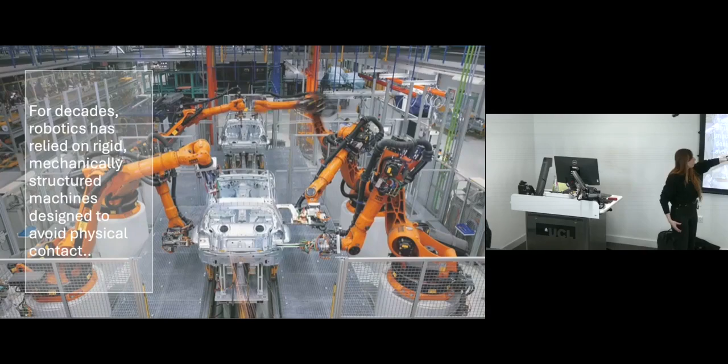So, you know that we started robotics with something like this, where robots were designed to avoid as much as possible physical contact, physical interaction with the environment. And mainly in this context, as you can see, there were no humans in the loop, sensors were mainly nonexistent, and the environment was really, really controlled. And robots were mainly programmed to do a single task.

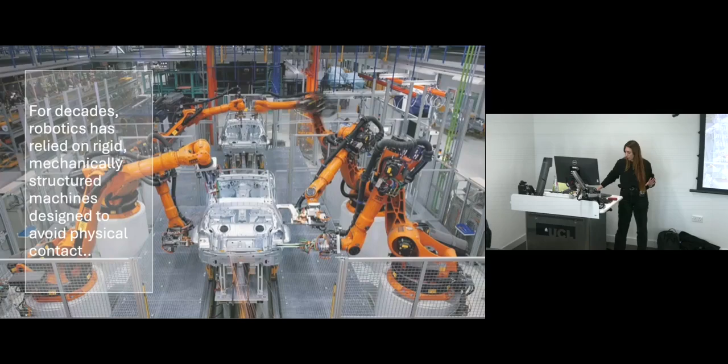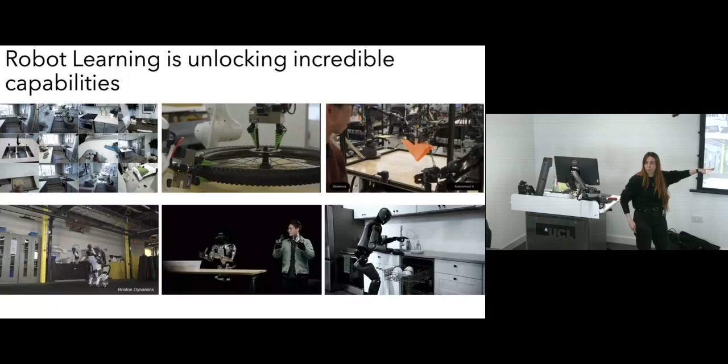But of course, we moved very far from this, and now we are seeing, and you are studying, that with robot learning we can achieve incredible capabilities that before for robots were simply a dream. And you can see this not just in manipulation, but in locomotion, and in general in dynamic behavior for control.

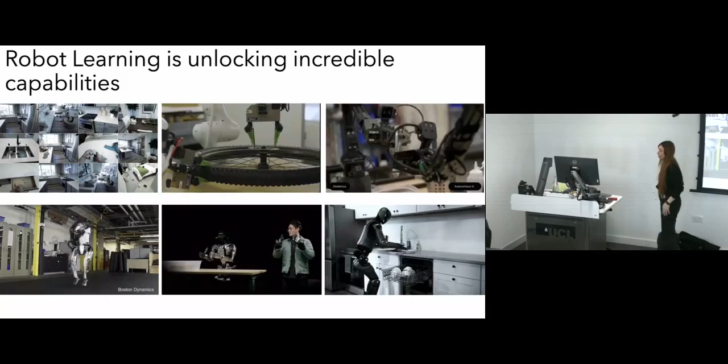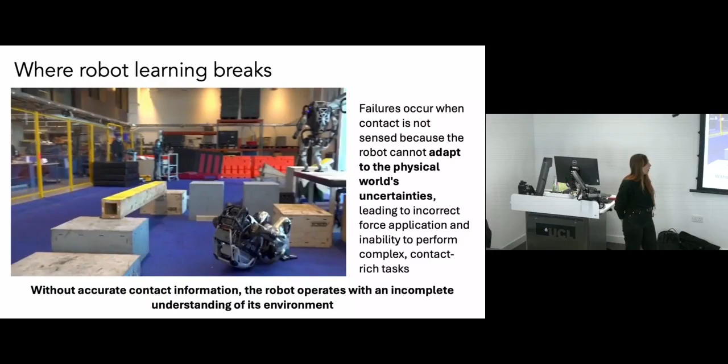However, today, what I want to draw your attention to is that, despite this, there are still situations in which robot learning still breaks. We can still see failure, especially when contact is not sensed, because the robot cannot adapt to the physical world. And so it is not able to deal with uncertainty, and this leads to incorrect force application, and maybe inability to perform certain tasks. So, without accurate contact information, the robot operates with an incomplete understanding of the world.

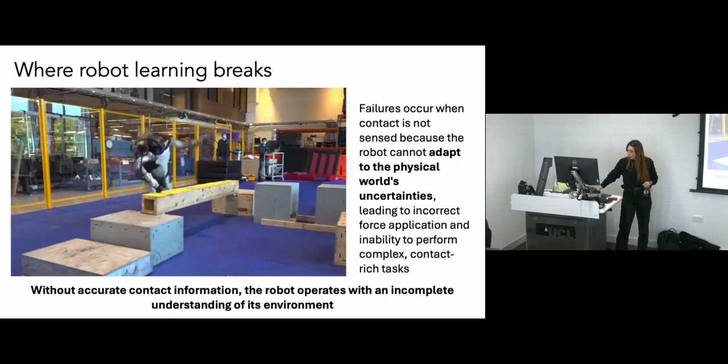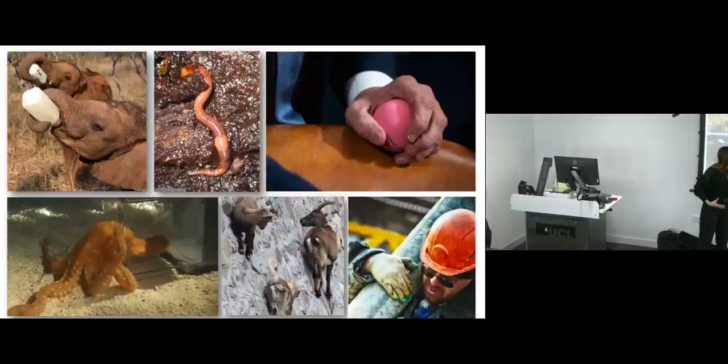And in the context of my research, to try to solve this problem, I've started to look at how biological organisms, humans, instead deal with this uncertainty. And if we look at this, what we can see is physical contact is definitely embraced. We have bodies that are not rigid, but soft. But also, we can really rely on our tactile perception, our sense of touch.

So what we will look at in this lecture is how I'm trying to take these hints and look at providing robots with the capabilities to safely interact with the environment, sense it, and enable this physical interaction. In this respect, my journey started with the design of artificial skin, in the past, when I was doing my PhD. And the idea was to provide the whole robot with the opportunity to measure interaction forces.

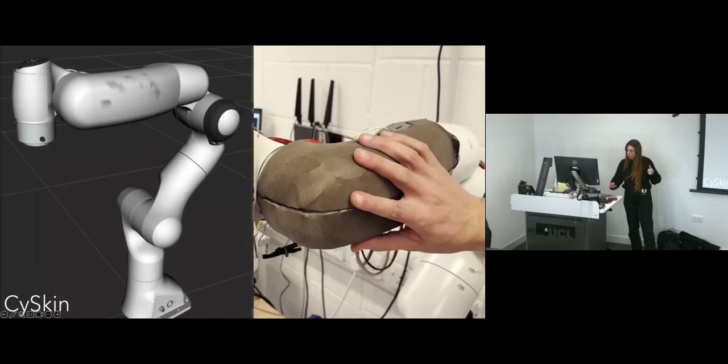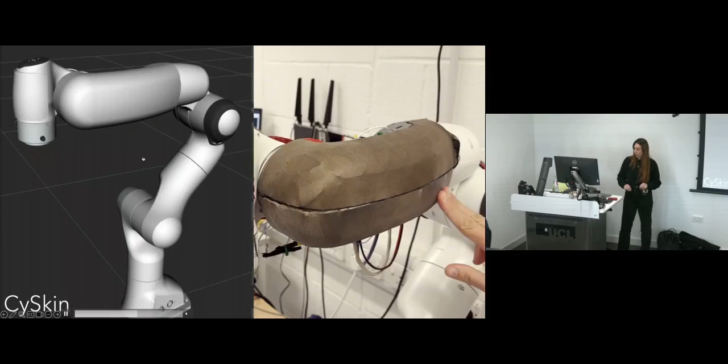But let me come back to this video. So you can see that you can still have an idea of the shape of the hand and stuff like that, but still with a resolution that was not too computationally expensive, let's say.

Of course, having this kind of information enables the robot to safely interact with the environment. In this case, this robot has artificial skin covering the whole black part, and it has no prior information of the environment and is not relying on cameras, but is exploiting the distributed information provided by this artificial skin to control the interaction forces and accomplish the task of reaching different parts of the environment.

This is not robot learning, it's classical control approaches, so this is just to let you put this in the broad framework. What we were developing here was a task priority controller, a sort of controller in which different tasks have different priority. The priority task in this case was to control the interaction forces, and the secondary task was the reaching task. With this architecture we could enable this sort of safe exploration in this cluttered environment. But also, as I was saying, this enables human-robot interaction.

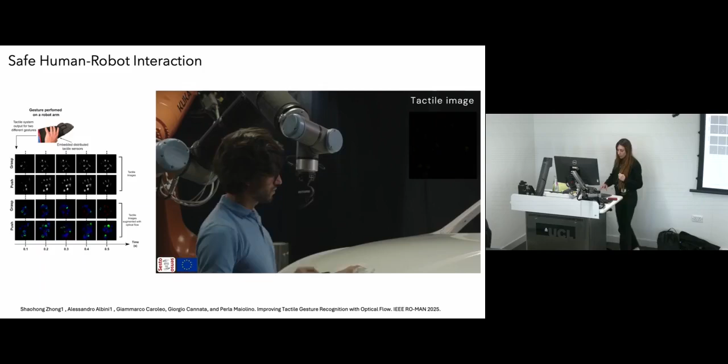So what we did was to augment this input with a sort of dynamic information, and with the optical flow we were able to add also this change over time of the contact that was happening. These two inputs together, provided to the convolutional neural network, enabled us to recognize different gestures that we later used to control the robot.

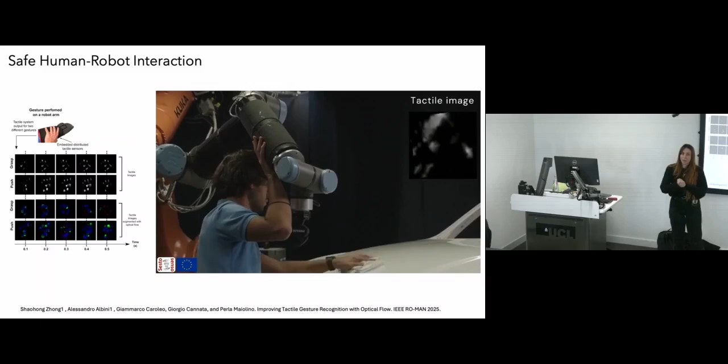I want to draw attention here to the embodiment. This robot is geometrically very easy in the sense that these are all, let's say, cylinders, more or less of the same shape. But there might be robot bodies that are quite diverse. So the same contact, the same gesture in different parts of the robot can generate a different type of tactile image. And so it becomes very difficult to generalize towards different robot parts or body parts, because of the embodiment role. In this case, it was simpler thanks to the geometry of the body.

But to enable safe physical interaction in dynamic environments, it's not just being able to monitor when the contact is happening, it's also providing the robot with spatial awareness, maybe observing the contact before it even happens, and combining these two pieces of information. This is something that in our body we do by combining proprioception and vision. So what we did in this case was to extend the previous artificial skin, providing it with distributed little eyes around the body. The reason was that we wanted to enable the robot to have spatial awareness without relying on external cameras. Imagine that you want to deploy this in the environment, you cannot necessarily rely on external cameras mounted in the environment. So you want the robot to have this spatial awareness.

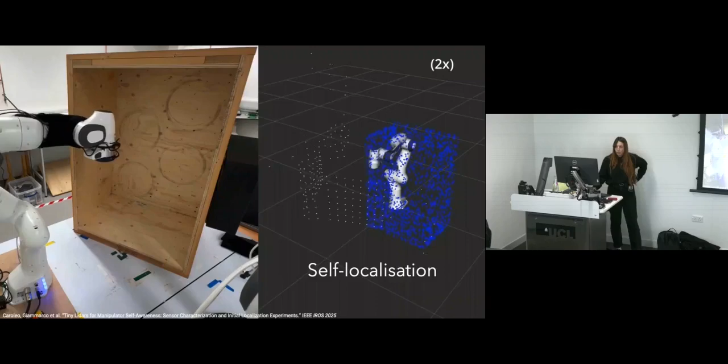But again, as I was saying before, we always need to find a compromise with the resolution, because this means computation, and we want to close control loops that are potentially reactive control loops. So we need to think about that. Thanks to this sensor, what we did was to enable the robot to perform self-localization, for example: mapping the environment and afterwards relocalizing itself.

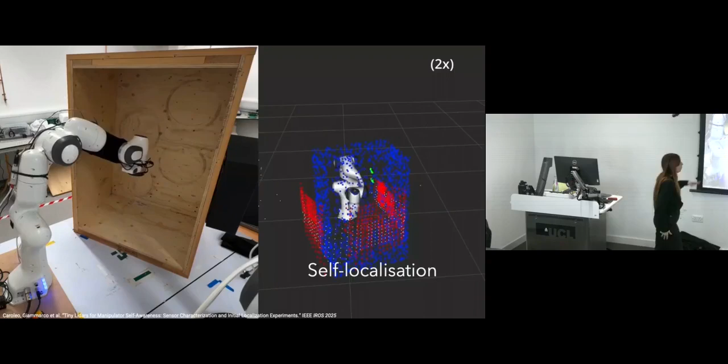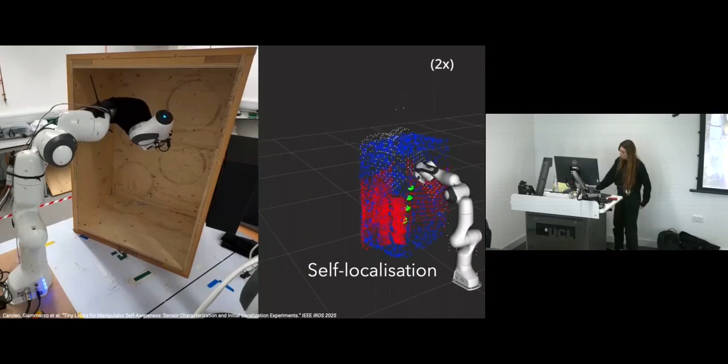In this case, what we did was to develop a probabilistic model of the sensor and use it applying a classical Monte Carlo self-localization algorithm. Another interesting aspect is that we were starting to combine information coming from these little eyes with the information from the tactile sensors. Here you can see that the red point cloud comes from the time of flight, and the green dots belong to contacts that happened between the robot and the box.

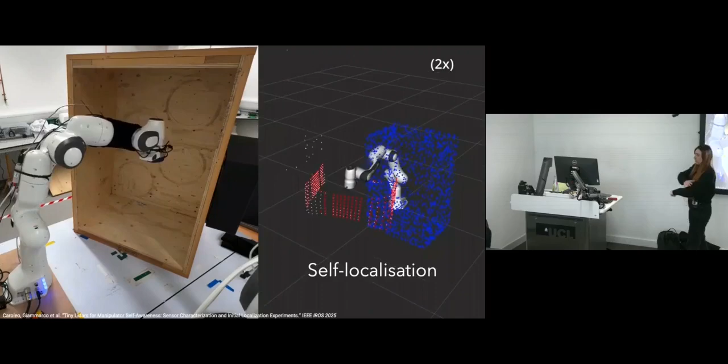Again, we were able to control the interaction forces, but this was also used in this algorithm to support the localization. I was also telling you we were using them to perform motion estimation. If you want to enable collaborative work, you want the robot to be able to estimate the velocity of an object or a human approaching and react accordingly.

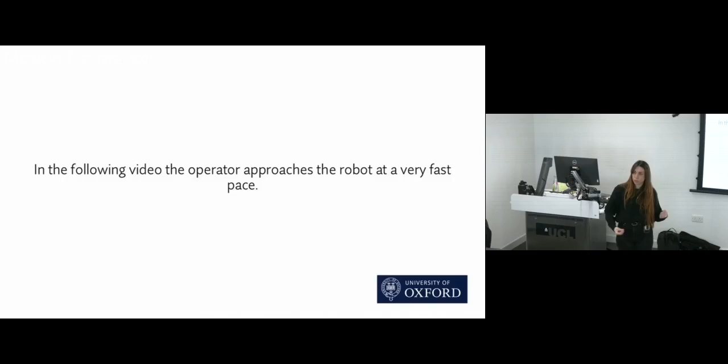So we needed to estimate this from the point cloud coming from the time of flight. It was not easy, because these sensors, as I was saying, are quite noisy. We needed to combine information from multiple sensors and project them all into the same space. Here we were using a sort of ICP algorithm, but even if it is a classical algorithm, we needed to slightly preprocess the information to achieve this result.

Learning means that we need to combine information coming from different sensors, because we want not just information about the geometry of the object, but also its physical properties, which is what touch provides us. Similar to what happens in our brain, we were trying to find a way to integrate the two in a single representation. When I say representation here, I'm not talking about a latent representation yet. I'm just talking about encoding both information in the same data structure.

I call it representation because we are representing the information through, in this case, a point cloud where the color channel is used to encode, for example, the stiffness of the material. But this is not a learned representation. Potentially you can use this to learn something else and later have a representation of something different. In this case, we were exploring objects and trying to encode their physical properties within this point cloud representation.

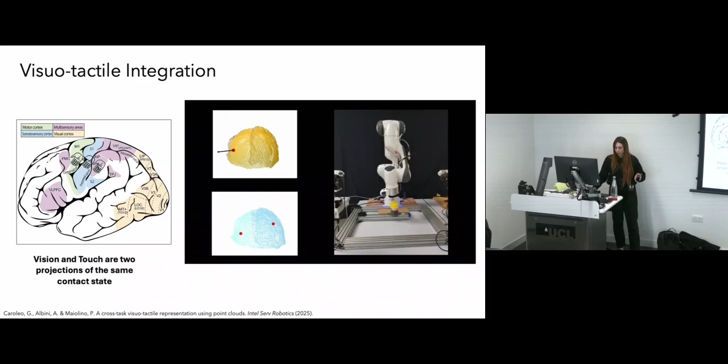That is because you might have, let's say, a bottle of water, and the geometry might look the same in two different objects, but they might be very different when you try to manipulate them in terms of their physical properties. So we wanted to explore this. We were exploring the object, assigning to the different points of the point cloud the estimated compliance, and this enabled us, for example, to control our interaction forces based on that.

So if you have something that doesn't give you that information from the visual perspective, but actually has different mechanical properties, you can control the robot to adjust its force to avoid squeezing the object. You can also use it in a different way. Imagine that if I'm relying only on vision and I see this situation, I might calculate the distance between these two objects and evaluate if my end effector is able to pass through without any unwanted collision.

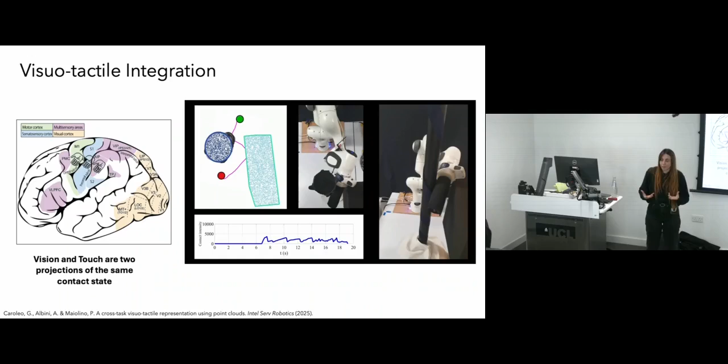However, once I have information about the actual mechanical properties of the object, which I can encode in this representation, I can exploit this and take decisions such that the robot, just to speed up to the end here, is actually pushing towards the object that is softer, this one, to be able to pass through. So this is, again, combining these two kinds of information. And of course, multimodality is something we should also look at in robot learning.

There is, however, a problem related to tactile. For robot learning that was based on cameras, we can rely on a huge dataset, ImageNet. So we have a lot of data, and we can train as much as we can. For language, we have the entire web. So again, we have enough data to use all these transformers and this kind of architecture that is data hungry. However, for tactile, this is more difficult. And that is, in my opinion, one thing that is limiting the use of this technology in robot learning. We are getting there, but I will tell you about this in a second.

So why is it difficult? It's difficult because tactile datasets are difficult to scale up. We don't have ImageNet for tactile. The reason is that for the sensors, contrary to cameras, we have so many different technologies available. So we have data that are, in theory, technology specific. Also, tactile is multimodal. Some sensors maybe provide only a certain type of information, but there are also sensors that can provide multimodal information. They are actually dependent, so it's very different.

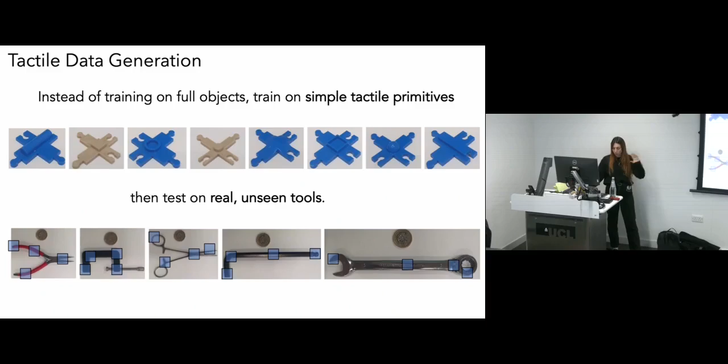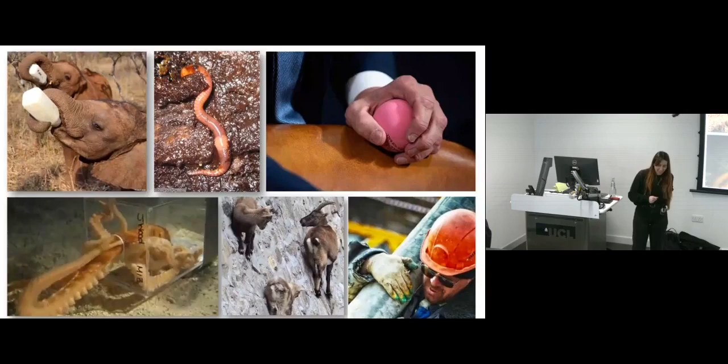Coming back to the original storyline, I told you that beside tactile, which is of course something I've been working on since my PhD, I've also started to look at the aspect of embodiment, and now we look at how embodiment also has a role in our perception and might have a role also in robot learning.

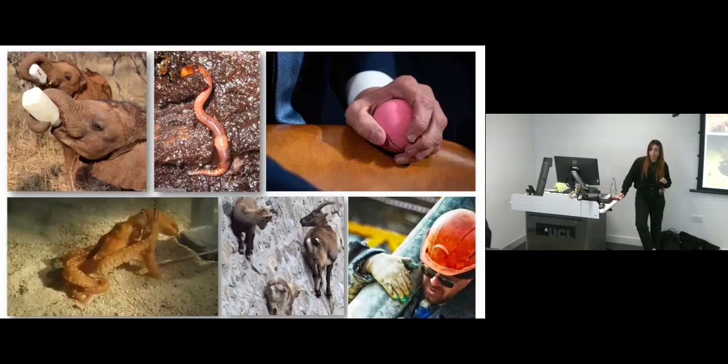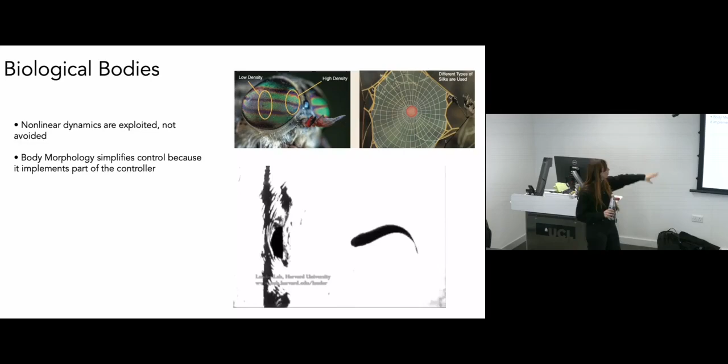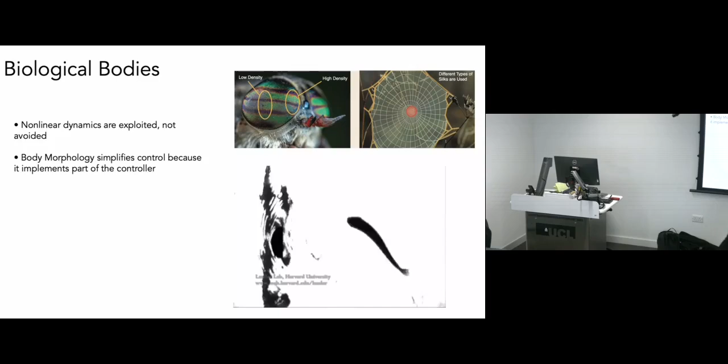Before going on, I want to focus again on biological bodies and compare them to the actual bodies we can see in our robots. First of all, biological bodies, differently from rigid robots, actually exploit nonlinear dynamics. For example, the arrangement in the eye is able to compensate for parallax effects, but also the way in which the spider uses the spider web is an extension of his body in terms of perception, and the morphology of the web and the type of thread that he uses actually transfer vibration in different ways, giving the spider the exact position of the prey.

So this is actually to show that nonlinearity is exploited, and also body morphology simplifies control. We are used to robots learning everything in the brain, but I think you can understand that this is not really scalable. At a certain point we need huge computational power. We want our robots to last in the wild for long, and they usually use batteries, so you understand there is quite a problem. Until you're in your office and programming, oh fantastic, the robot there, fantastic. But the moment you want to deploy something out in the world, this might not be so easy.

So in this case, as I was saying, body morphology simplifies control. This is called the dead trout experiment. Here you can see the actual movement of the trout that is placed in flowing water, and if you didn't know, you would probably think this is a fish that is swimming.

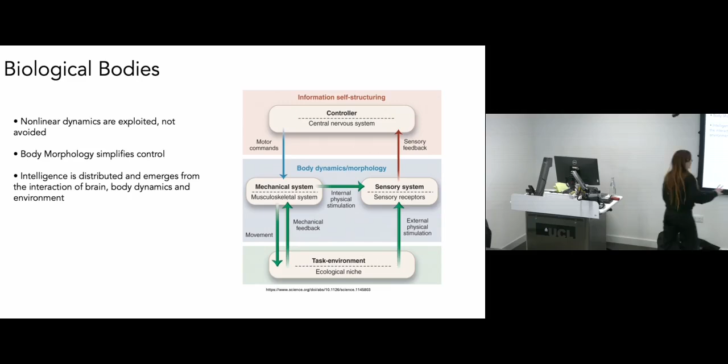But also, as I'll show you in a second, with robot learning what we're looking at is making our robots very intelligent. But intelligence is distributed in biological bodies, I was saying, and can also emerge from the interaction between brain, body, and environment. This explains it very well. Before, we were used to a certain paradigm in robotics, which is sense, think, act. Here, we have this part where body morphology actually has a role in our perception and intelligent behavior.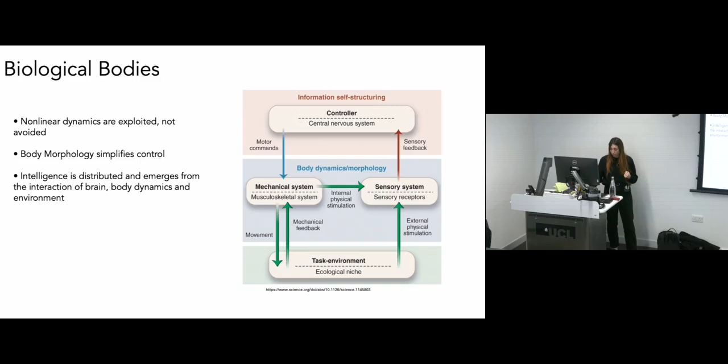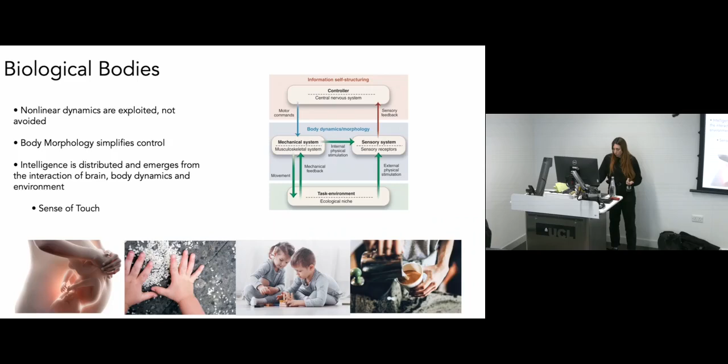And of course, this is the reason why I'm working on these things, because it's strictly related to touch. Our intelligence develops through the fact that we physically interact and use this sense to understand the physics of the world. How I approach this for robotics, I look at manipulation, simply because the hand is very fascinating and it's a difficult problem in robotics.

We have more than 100 years of people trying to make hands. Of course, now again we are seeing incredible hands, but I was interested here more in understanding this aspect of how embodiment actually affects my perception, my tactile perception. So what we did was try to design a hand that included softness, compliance, but also a little bit of structure.

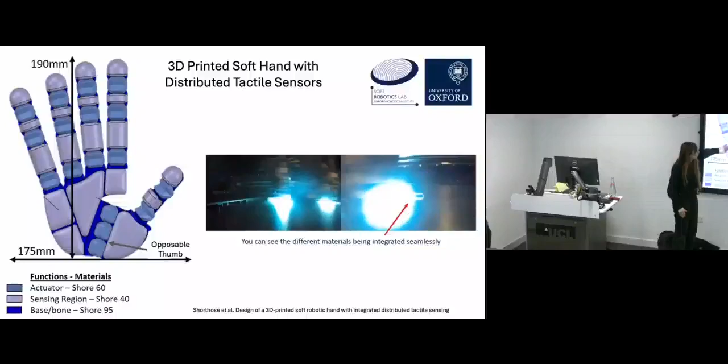So the mechanics of this is not completely soft, there are some structural aspects. But also I was trying to integrate a tactile sensor in a monolithic way, trying to print the system with the sensor already in it, because I wanted them to be part of the embodiment itself. So these are chambers filled with air, connected to a barometric sensor. When you press, you can measure the pressure difference between the internal pressure, which in this case is atmospheric pressure, and the external pressure when you are in contact.

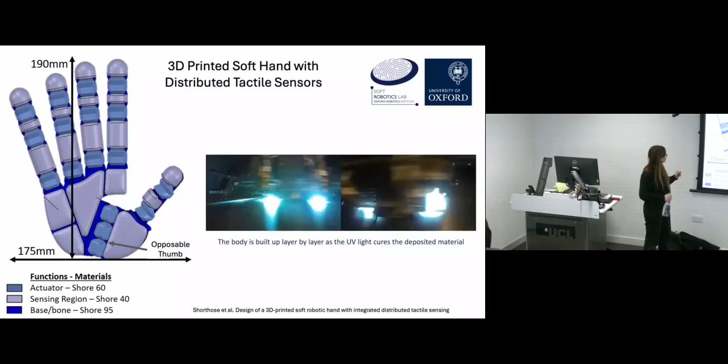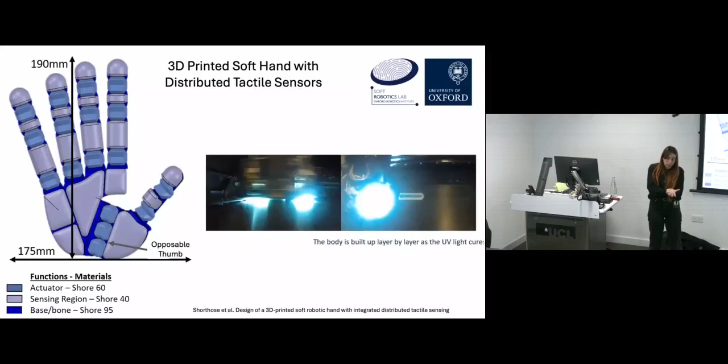I was not very interested in high spatial resolution here, I was more interested in exploring. What I wanted was the whole hand with the sensor, because I wanted to explore the adaptability and the embodiment. So we 3D printed it, and you can see that thanks to this compliance, even with simple control, just connecting all the actuators together and making a simple open-close open loop, you can actually adapt to different objects quite nicely.

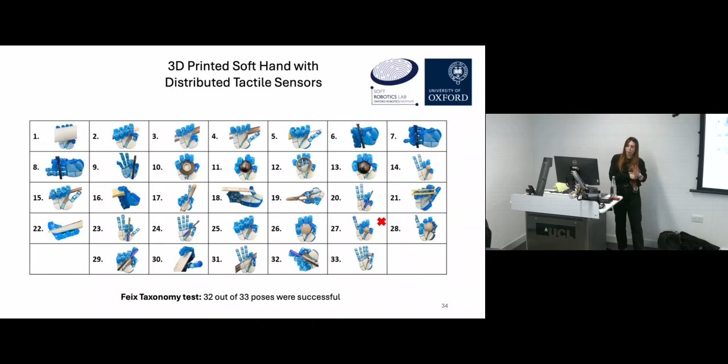The hand could be controlled with all the different degrees of freedom, but in this case I was trying to explore more its morphology and compliance together with the tactile sensing. This shows that we were trying, in some way, to replicate some aspects of the morphology of the human hand, in particular the kinematics.

The idea for me was, usually when you try to recognize an object with a rigid hand, you need aspects of proprioception, meaning the information of the posture. You need probably to plan how to grasp and so on.

Here, what I wanted to explore was that thanks to this compliance, the embodiment actually has a role in how these tactile sensors are activated when we get in contact with objects.

Here what you see is the different colors corresponding to the pressure measured depending on where we touch the object, similar to when you put your hand in your bag and try to find the keys without looking into it.

We wanted to be able to recognize these objects, and for doing this we developed this architecture, and we implemented it in a sort of Bayesian way, similar to how we actually do it.

Imagine again your hand in the bag: you start to touch, you get some information, you have a belief of the object in your bag. Maybe you touch again and collect another belief, and this, together with the information from your tactile sensor, updates your current belief. At a certain point, when you've reached enough confidence that the object you're touching is what you're looking for, you can pick it up.

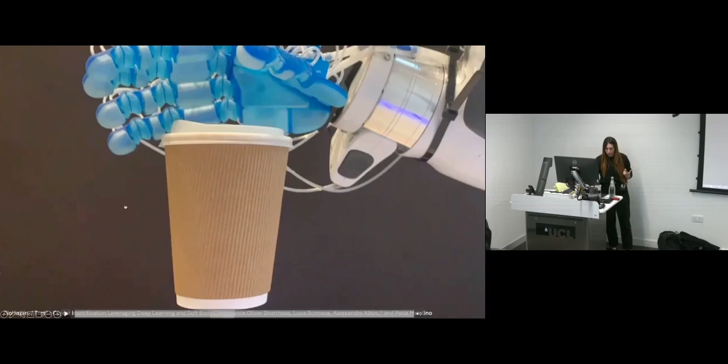We were using a convolutional neural network to identify different types of features. At this level you can see the recurrent neural network, which was the part where information from the current touch was combined with the previous belief to update the current belief and recognize the object. So here you can see, right?

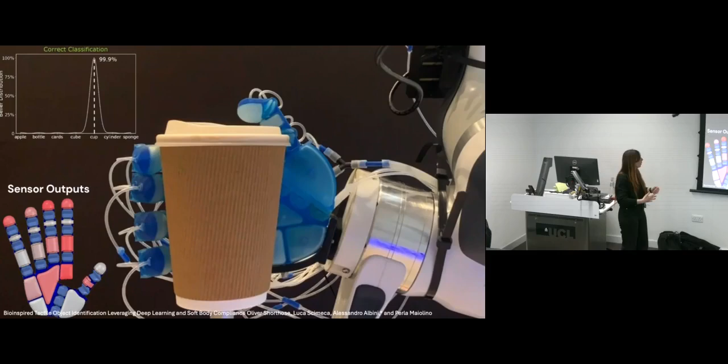So on the first touch, you have a guess, and as you continue to touch, you start to update its belief, until you recognize this is the cup.

Thanks to this architecture, this is why we were using this type of architecture instead of a transformer. First of all, because of the problem of data-hungry architectures — we were not in a position to collect enough data that kind of architecture would require. Secondly, a convolutional neural network let us exploit the spatial information encoding the aspect of the contact, so we could do this with the least complexity possible.

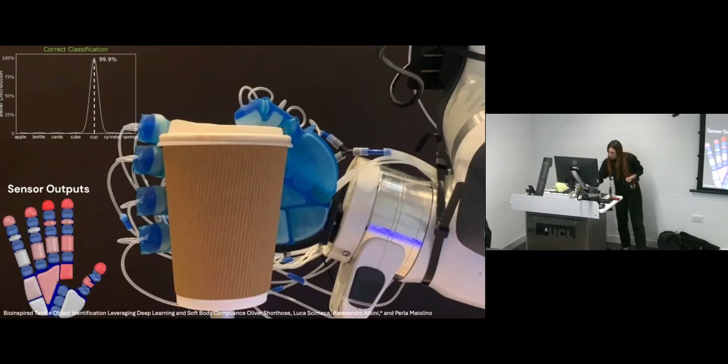Going forward, as I told you, part of the control can be implemented by the body if the body is designed intelligently. So I started to work on design optimization methods, especially for soft robots. It's not very straightforward because we don't have a long history of robot design, so the first approach was by intuition, trial and error. But what we want is to instead design systems that enable us to design the right body for the actual task or the ecological niche where we want to place our robot.

So what we were doing here, this specific case, was looking at shape matching. Imagine you have a sort of tentacle robot, a soft arm, and you want that arm to achieve a certain shape. We were trying to design a system where we first exploited finite element simulation to collect data used to train a surrogate model. This surrogate model was used through a bi-level Bayesian optimization to achieve the kind of morphology of the body that enables us to achieve a certain shape.

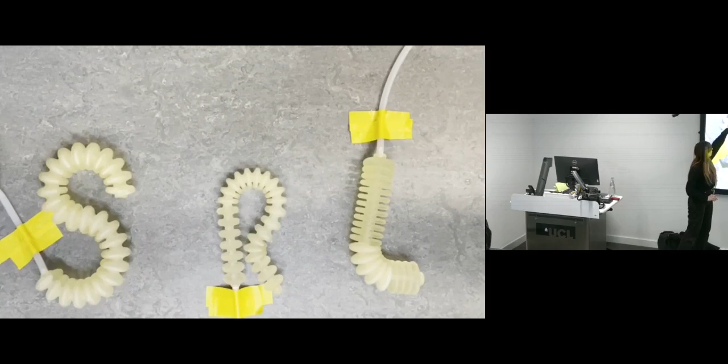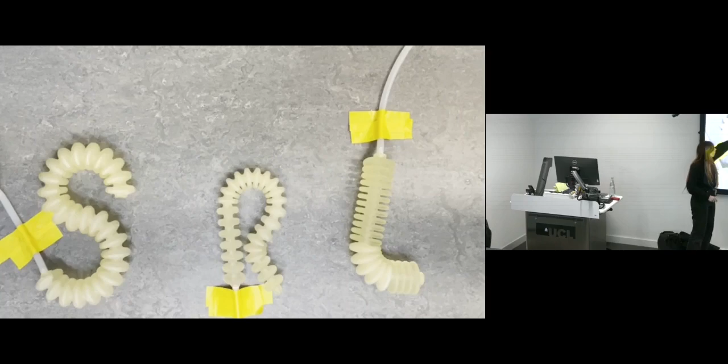So for each of these elements we find where to place certain constraints — material that is more rigid in certain parts, changing depending on the shape. You can see some are small, some are large, and so on. So part of learning is also learning a model that enables us to understand the behavior of such a system, and we can use that to design their body intelligently.

We also expanded this a bit more, instead of doing a single task — this isn't published yet, we submitted it. The student has to graduate, so I hope they take it on.

So the idea was: we cannot do just a single task, because we want a system that, depending on the task, gives us the right body. How can we do that? The task may be manipulation, a gripper, but it could also be more like a tentacle, or in the future locomotion or stuff like that.

So what we were trying to do here was a similar approach, learning the model of different elements of these potential robots, and given an input, what is the corresponding output. We were not focusing only on pneumatic systems here, we were also using a tendon-driven system, trying to generalize the full framework to actuators beyond just pneumatic.

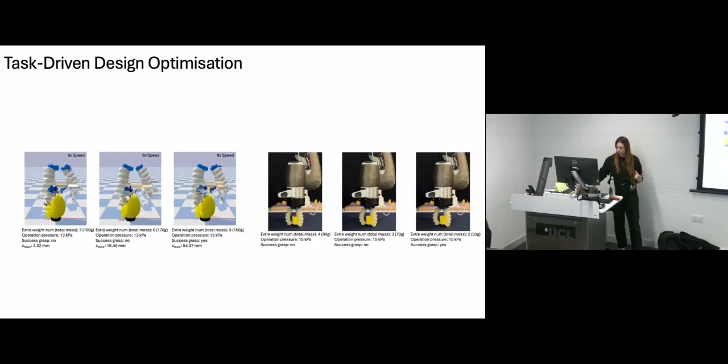We were trying to also evaluate for other tasks, like this was the shape matching, so I don't know why the videos are not running right, but the idea is that we were also able to, let's say, learn models that were robust to gravity and so on.

That is usually something that is very different, so it's a sim to real problem, more or less, and we were trying to, let's say, overcome that aspect of sim to real, because you can definitely get a design from the simulator, but when you actually translate it in the real world, this might have issues.

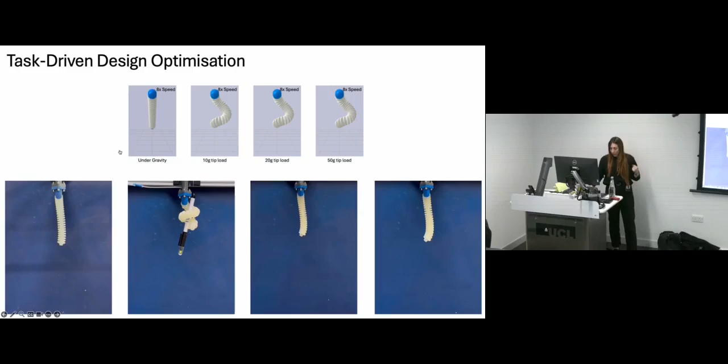This also has been extended in a different, let's say, scenario, in the idea of optimal placement of sensors and optimal morphology of the sensor. So you know that tactile sensors, these actually are pressure sensors, but in general they require a sort of deformable layer, so the material of that layer affects the perception, and acts actually as a low-pass filter, depending on its mechanical properties.

And we were actually placing the sensors, not uniformly distributing them in the sole, but placing them exactly where they were needed to be able to reconstruct the pressure distribution in a good way without overloading the power consumption and computational aspect, because usually for wearable systems you have very limited computational capabilities locally.